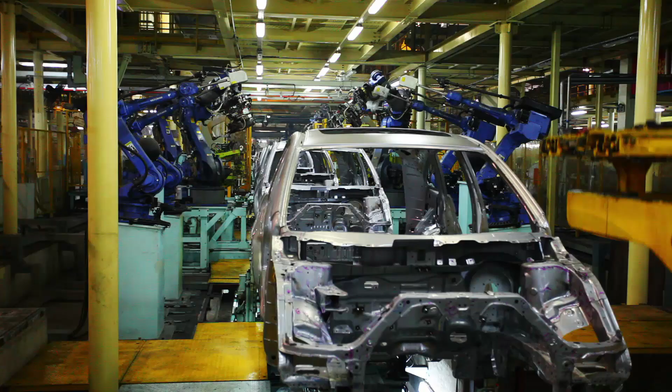The challenges that face magnesium are really the same challenges that face many of the metals and materials that we use in our everyday lives to manufacture the goods and materials that are important to us, that are essential to the way in which we live. Climate change makes it imperative that we reduce carbon emissions. Magnesium offers some particular advantages in this battle against climate change.

It is, of course, the lightest of all the structural metals, but more than that, it is very recyclable and it's non-toxic, and it's also very abundant. So magnesium being light means that when we move goods around through transport, etc., we can do it more efficiently because it's light, so we move more payload and less vehicle mass as we go. So it is really part of the solution.

Magnesium and green technology go hand in hand. And the more we realise that we need to sustain the planet and develop sustainable industries, the demand for magnesium becomes even greater. Hatch understands the process technology for magnesium. Unlike aluminium, where there is really only one process technology, with magnesium there are several. And each of them is unique because the resource is unique in each case.

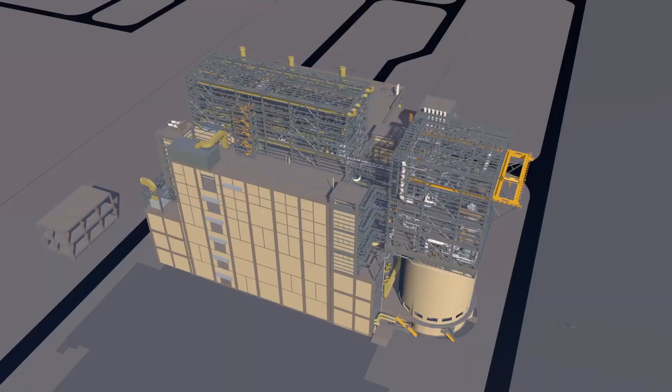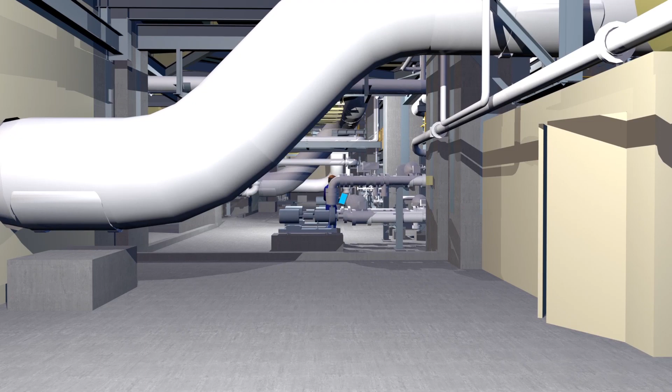In the project we're doing in China, the main issue is electrolytic process technology, but it had to be adapted to the feedstock that was available in China and also the site conditions. The plant was built at very high elevation and that required many changes in the process.

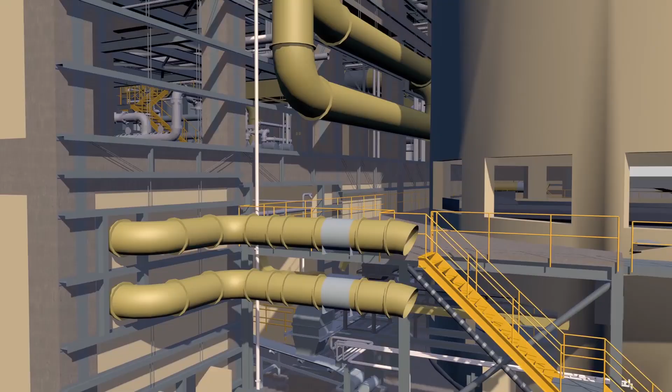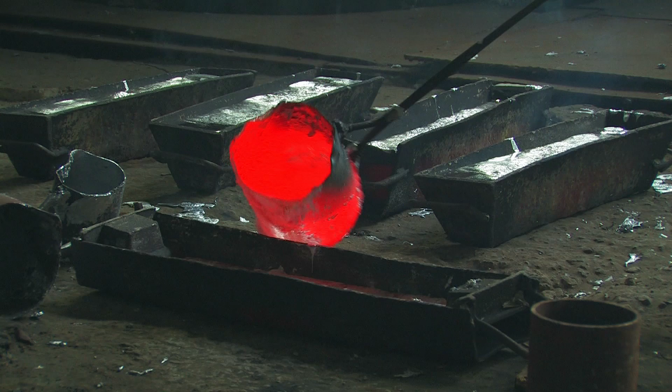In China, the average greenhouse gas emissions per tonne of magnesium has been calculated at 45 tonnes of CO2 per tonne of magnesium produced. In the project that we are developing now with our Chinese partners, it will be somewhere less than 7. And another advantage of magnesium is that it's a very recyclable metal. Similar to aluminium, it has a fairly low melting point. And so it is much more efficient to recycle the metal than it is to produce it as a primary metal, much more energy efficient.

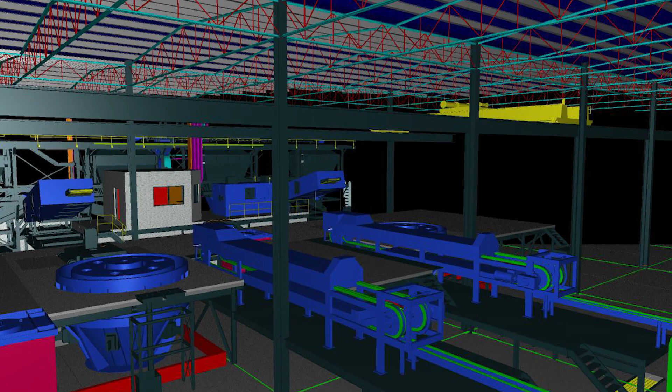Hatch has been involved in the development of state-of-the-art recycling plants. Hatch was the first to design and build a recycling plant based on induction melting technology. Induction melting technology is much faster and much more energy efficient. Hatch understands these processes in detail, so we can help our clients select the right process that produces the minimum amount of waste for their particular resource. There's always a better way, and we're always looking to find it.